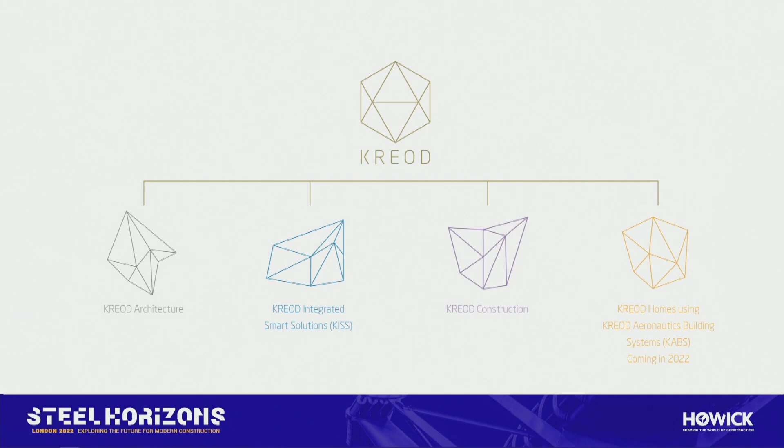It's called KREOD Architecture. And we have a startup company called the KREOD Integrated Smart Solutions, KISS. Under that brand, we have formed the KREOD Integrated DfMA Intelligent Automation Tool software. Following that, because we do the digital assembly simulation, the question is, what can builders do that we can't? So it turns out we're the contractors now. We're also using our own technology. We developed the building systems called the KREOD Aeronautics Building Systems, KABS. So we're launching KREOD Homes, which is going to be fully customized, parametric, and ready for fabrication with a clear costing and deadline, etc.

So firstly, I'd like to share my personal story. It's the KREOD London Olympic Pavilion, which I designed and built for the Olympic Games back in summer 2012. It all started with an idea. My background is computational design and digital fabrication, which is still playing a very important role in the AEC industries.

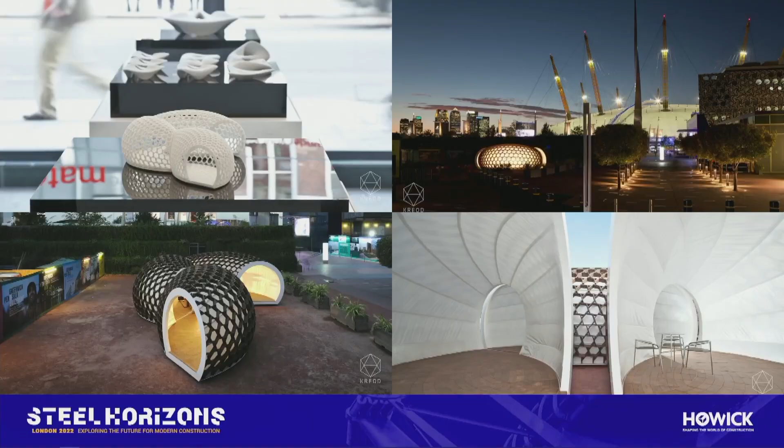Following my studies, I came up with this design. It's a pavilion. And when I asked around, I wanted to build it. When I asked my colleagues and teachers, they said it's impossible. Why? The reason is because I was a young graduate and I simply didn't have the recipe of success because so much I didn't know. And there's a real world out there.

There's so many challenges. So the question arises, who is the client? Who's going to pay for this? Where do you build this? How to do this? Who's going to solve all the design problems? I couldn't answer all these questions, but I firmly believe I can do something.

So I transformed from a student into an entrepreneur, started pitching a range of companies. I sent thousands of letters, spent £2,000 on stamps and envelopes, pitching this idea. After thousands of attempts and failures, I've managed to convince a range of companies who believed in my dream. So they kindly sponsored their products, services, materials, and also the land outside the O2 arena.

So this is the pavilion I designed. It's a movable kind of structure. It consists of 3 identical elements on clusters, so you can push them around, creating different types of exhibition spaces during the day. At night, you can push them together. It glows in the dark like a Chinese lantern. It also secures itself.

So each pavilion is a very small job, but it's super complex because it's double curvature. Each pavilion consists of 997 unique pieces. Imagine if each member is 1 millimeter bigger, 997 pieces later, it's 1 meter off.

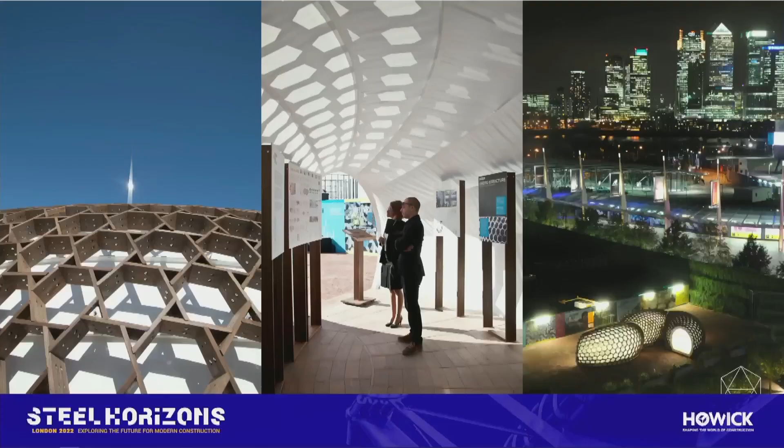That was the comments I had from my colleagues. And so this is the very complex project. It was our first attempt. It was a fully paperless design, engineering, manufacturing, and construction.

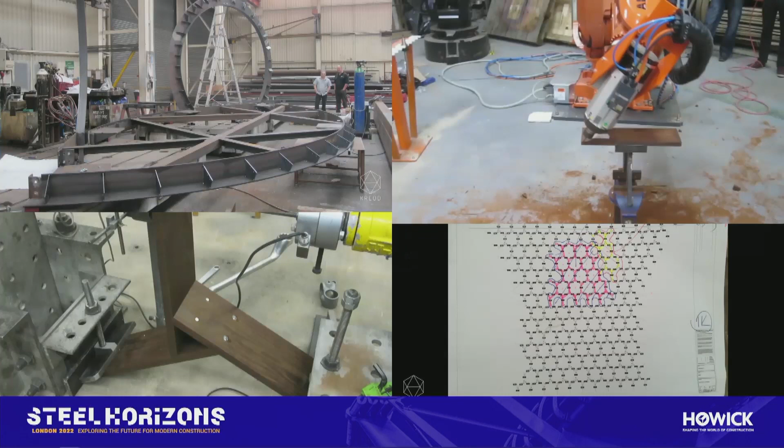And it gives an idea - the steel plant. I closely worked with the steel fabricator, and even understood the chamfer for welding, giving the 100% detailed model. I didn't know the term DfMA, Design for Manufacturing Assembly, but I called it Design Information Manufacturing Modeling.

So this is what it was played at. That's how it was made, because each member is cut in a 3-dimensional angle. It couldn't be made by hand. And the accuracy needs to be aerospace accuracy, plus minus 0.02 millimeter. And the only paper we had was this A3 assembly diagram.

I didn't want to bring my shiny MacBook Pro to the building site, so now we can use these iPads. And we successfully delivered this project. And actually behind the scene, I created a new workflow.

But the workflow is very, very complicated because it requires a very specialist skill - the programming, scripting - and then from the knowledge sharing and product life cycle management point of view, this is not transferable, because each designer, or with computational design, they always come up with a different solution, the same outcome but a different journey in terms of programming. So I found this very difficult to manage.

And also from the business point of view, you can see this kind of job requires a special skill, and that's the risk. So I realized that I must come up with a system so that you can automate the process, so we can focus on business growth rather than dependency on highly skilled people, which is very, very dangerous in the business world.

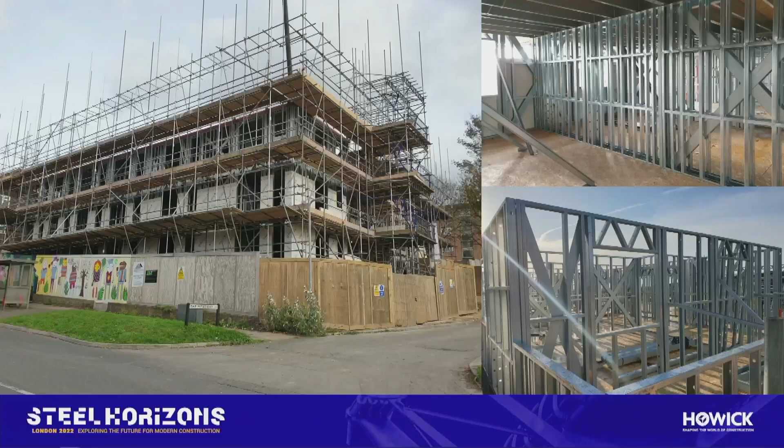So we've been in the background developing an automated light gauge steel frame software on Dassault Systems. This is a job we were involved in, working with Nigel closely, and also Nick. We've been doing this automation. So the principle is, just automate the process, really.

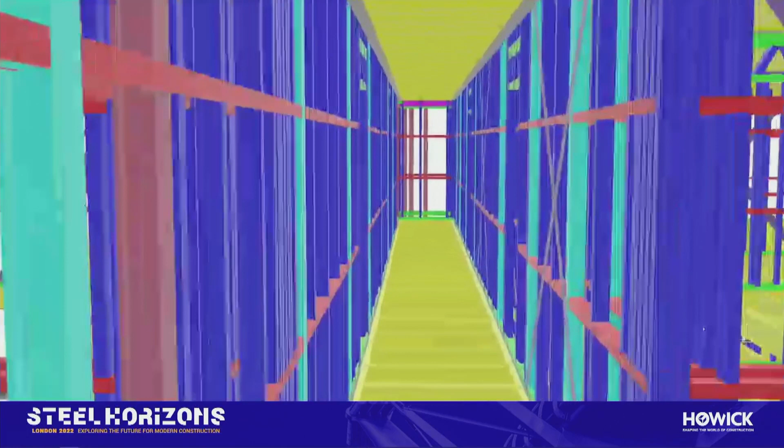I think this job can be easily generated - the computer does the job, which is 3 clicks. And I would say it was 3 hours - yeah, we can change to a better computer. And the principle is very simple: a surface. This example, a surface or a solid, a block. So it generates a wireframe so I can pass it to my engineer Nigel to do the structural analysis.

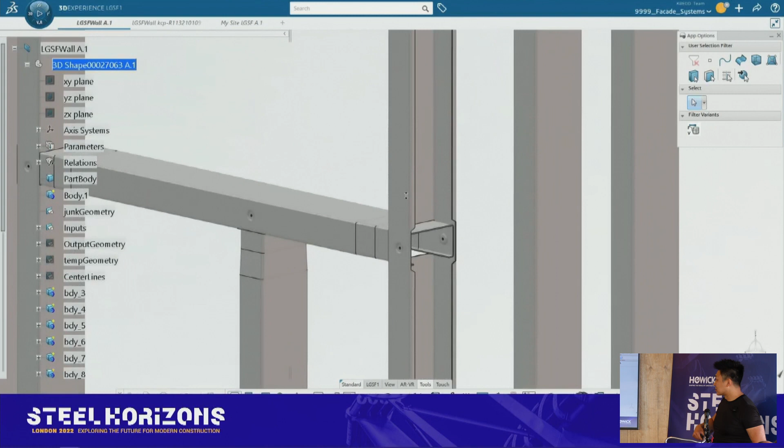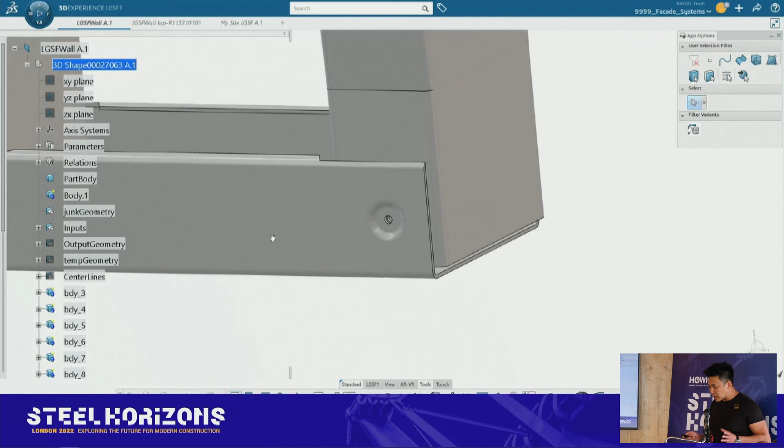Once we can replace the stick models, it generates 100% detailed steel frame. And also in the background, it automates the drawings, which I don't need - it's just for building control, and more importantly, it's the manufacturing code. So I can pass it to Viri, one of our manufacturers based in Lithuania. So in this way, we're in control, because the steel frame itself is just the beginning, actually.

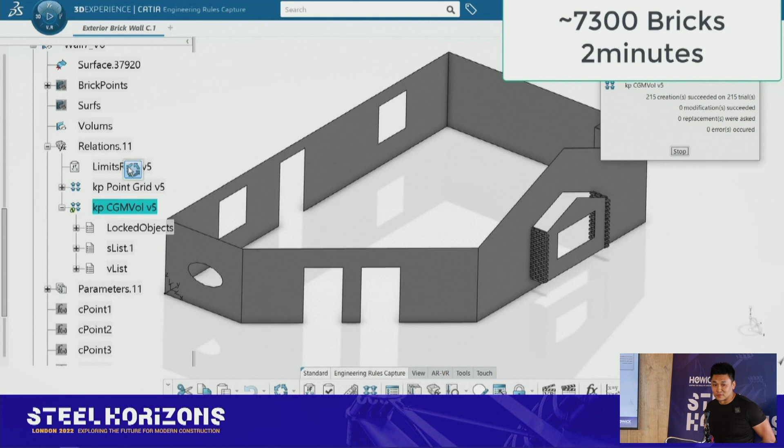We need to consider the facade systems - the brick slips or cladding panels. So I have invested and developed a range of automation tools. For example, this is just a random surface - you just click a button, and it tells you we need 7,300 bricks. So the steel frame for Howick, just with manufacturing code, we can give it to any manufacturer in the world, and the rest of it, bill of materials.

So people always ask me, how much? How much does a building cost? How am I supposed to know?

You know, I can't tell you. But now, actually, it's an informative design approach from concept design, or the RIBA, the beginning of the RIBA stage 2. We can immediately arrive to the end of RIBA stage 4.

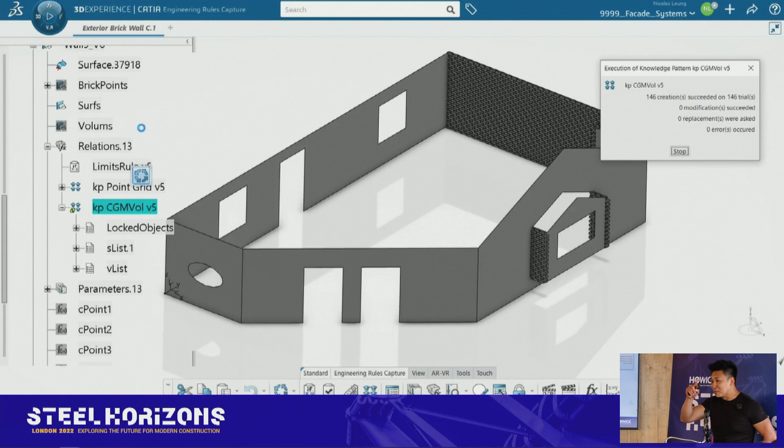So if you're using brick slips at concept, we might consider other cladding panels, say steel panels. But the steel price has doubled since the beginning of the pandemic. So we might consider composite cladding systems.

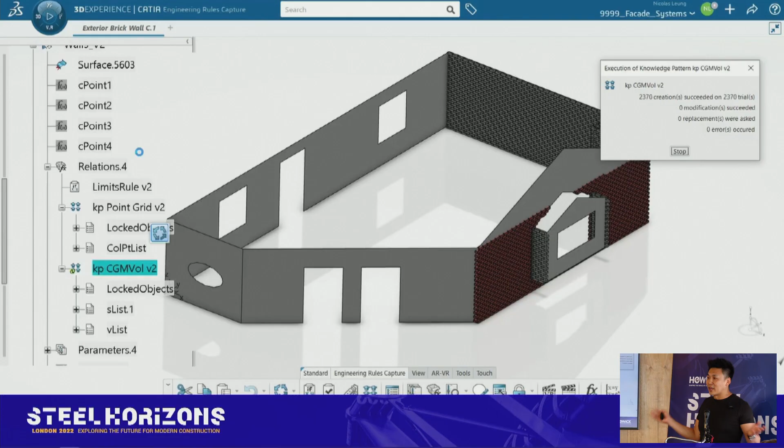This kind of informative design approach gives you certainty when you're running a business as a developer. Because once you decide the material, say Kingspan cladding panel, but now the price has doubled, suddenly your project is no longer viable. But if you knew this, you can make an educated guess what the steel price will be in the next few years.

So we might think, we're going to use composite panels because the pricing isn't jumping too much. Once you've got the planning permission, it's not that easy to change it. So this is the solution.

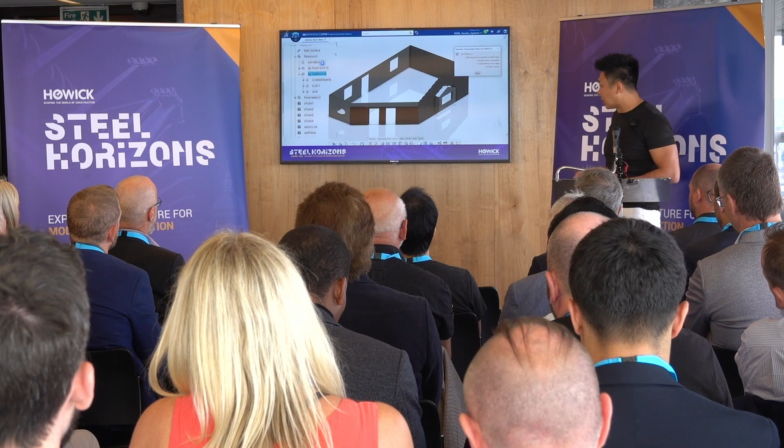We work with developers as well as a principal contractor, building a range of buildings, residential developments in London, and there's potentially an apartment block in Birmingham as well.

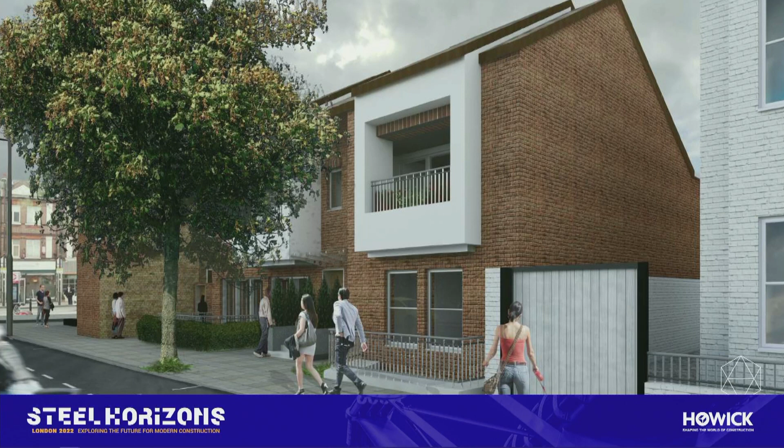So this is the job. We are the principal contractor, so we provide turnkey solutions. This is one of the projects - my investor bought it as land with planning permission, and our job covers so many roles: turnkey contractor, lead architect, project manager, principal contractor, and also the MEP contractor.

That's another challenge, it's a very steep learning curve. I never understood why this industry worked in the way it did. But anyway, we're solving problems step by step.

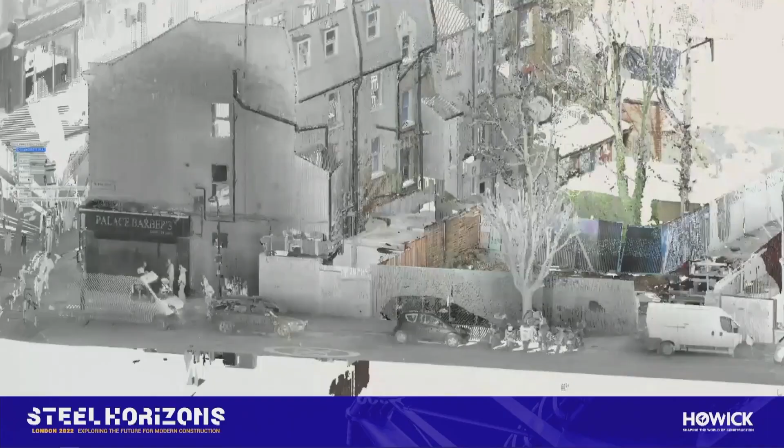So this is the risk assessment. Really, we don't use any drawings - we had to produce a drawing for my subcontractor, the basement contractor, for setting out drawings. But as you can see, the site is very, very tight. You've got illegal basement developments next door. We just don't know where they are, how deep they are. We didn't know the condition.

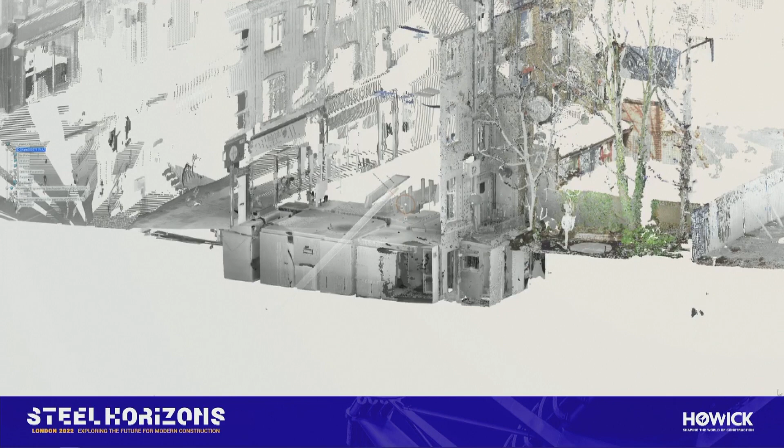We did a point cloud scan, which is 12 gigabytes. Initially we had a ground beam planned on the site, and I realized that's just very risky. Even though we did 12 pits and dug down...

Actually, the internal wall is 107 millimeters away from the boundary line. So if we build a trench, it will crash into their building and there will be some claims in the future. So before construction started, we saw the problems. We changed the design - it just keeps us out of trouble, keeps everyone out of trouble.

And also the construction simulation is very important, because my background is not an architect really. We design buildings, and we're now building contractors.

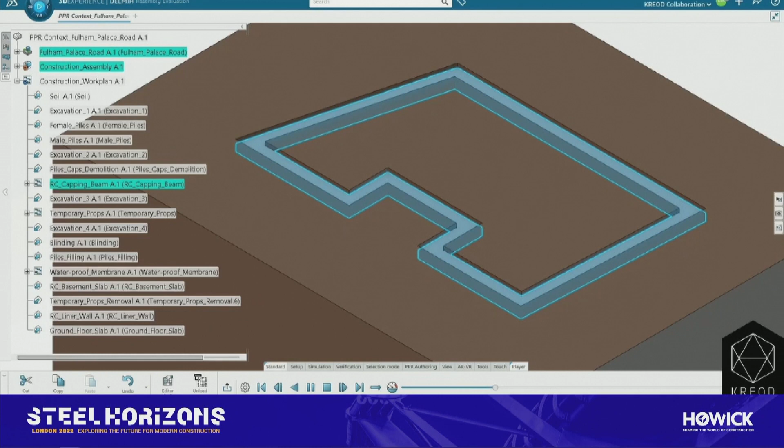So we do using simulation, assembly sequencing. We understand from the detail of the 3D, it drives the Gantt chart program. So we understand any changes, any impact - you consider dependencies a month ahead.

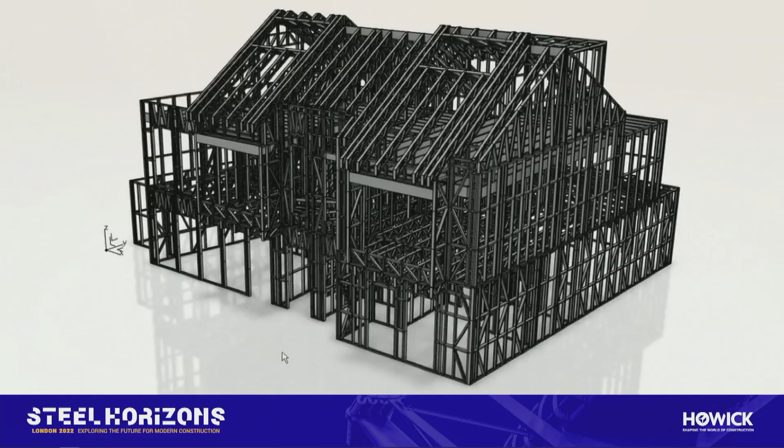So it puts them in a really, really strong position. Understand, it's all about risk management at the end of the day, finance as well. So we program everything in terms of logistics, how things go, how things run, which is going very well. And this one we're finalizing detail with my structural engineer - so we just automate the process.

Another thing is the MEPs as well. The current issue with all this framing software - Techno, anything - the problem with them is they want the final design. But the final design doesn't really exist until we get the MEP designs, because it clashes. So the current software we have in the market is very tricky if you want to make a change. For us, it's just a few button clicks.

I'll show you some more examples. So we can understand, any design changes, we can just change accordingly. This is fully parametric from the steel frame, the building envelope, internal fit out, plasterboard - how many sheets of plasterboard, boarding, everything. So that spits out the cost, a spreadsheet, a shopping list.

So what I'm introducing here is open book contract. Costs, this is my labor, and this is our profit, which is 28% profit on the construction, really, really high because of the efficiency. And we don't need people. That's the beauty of it.

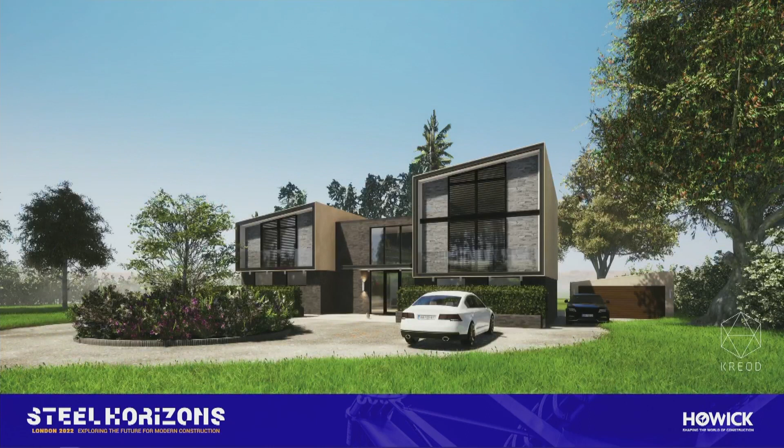This is another case study we did. This is the primary house we designed. We had two architects before us, both from Grand Designs. It's a greenbelt development, and they didn't get planning permission. So we came along, we're very good at plannings as well. We got the planning, and it's a private house, really nice actually. The cost for this, we actually changed the design, even double high sliding doors. So the price of this job is £180 per square foot.

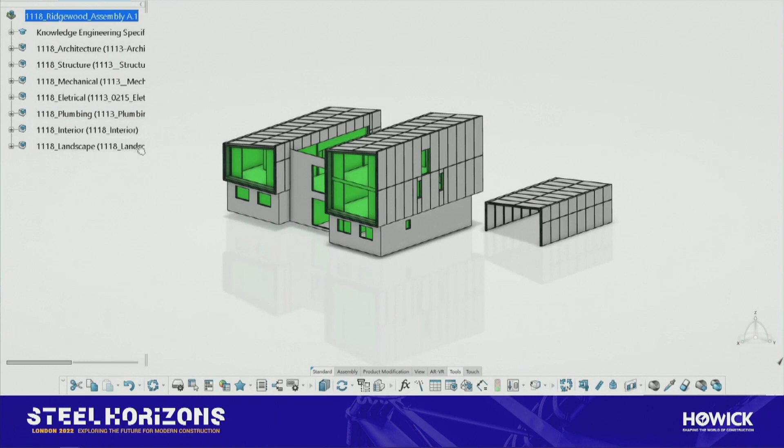It's pretty high end. And there's an entire automation simulation that gives an idea, from the concept design, our KREOD tool, automation tool, and it clicks to the garage. Very conceptual design, reference surfaces. You click on the panel, in seconds it generates 100% detailed cladding panels. And you click again, it will generate all the cladding rails.

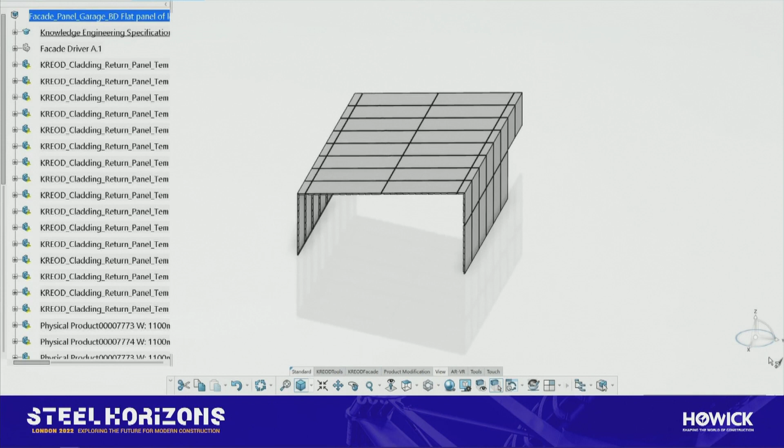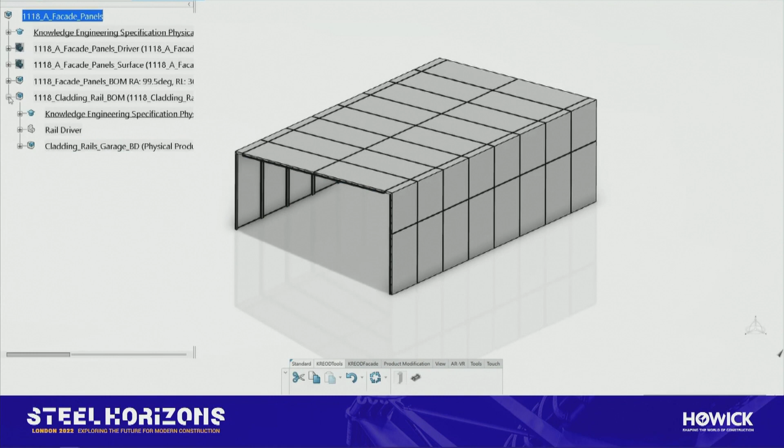So the way we program it, it's definitely going to work. If it doesn't, it won't generate it anyway. So there's an engineering template we created. And behind the scenes, it generates manufacturing shop drawings, manufacturing code if you require, anything quantifiable. It just gives a spreadsheet - people are interested in how much.

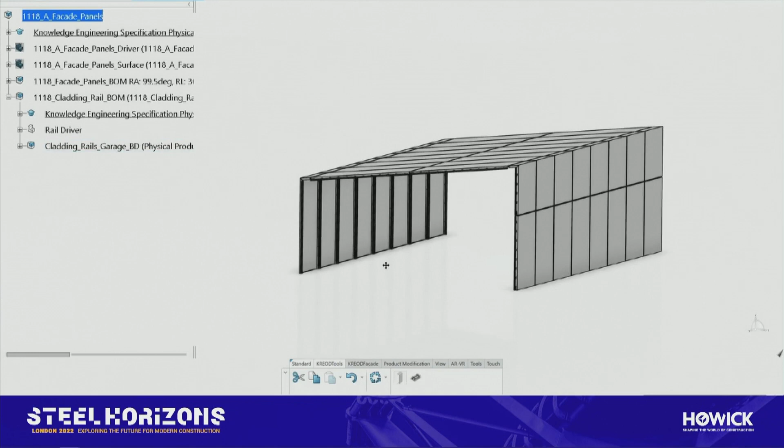So this is a level of detail, fully automated. Maybe some manual tweaks, but pretty much it's just a click. So the idea is my receptionist can click and do the job without realizing what's been done, but the job is done. All we need to do is due diligence - check, is that okay? It should be, yeah. Just double check.

And this is the envelope, just the envelope itself. The building we changed 12 times. In the beginning we didn't have the budget for the underfloor heating, and the client wanted - because they're private clients - they wanted the roof pitch to be steeper. They wanted to see different options.

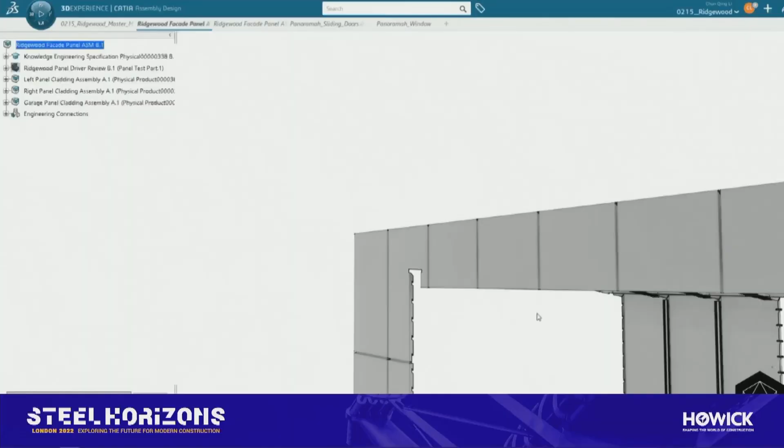And if you work in the traditional way, you're the architect, you produce design intent, you give it to the appointed principal contractor. The principal contractor needs to hire a facade engineer. The facade engineer needs to work with a manufacturer. So if you make any changes, the chain of effects - people want more money, need more time as well. That's how the relationship goes pear-shaped. So now we have this solution.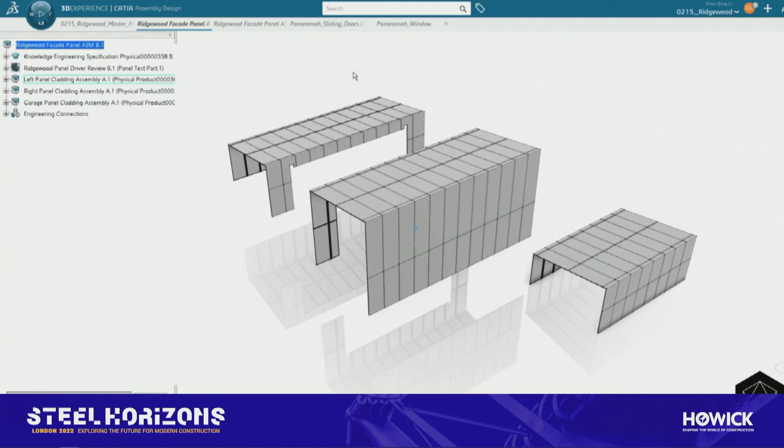We made the changes in front of them. You click, 7 minutes, no hard feelings. What else? So 12 changes - it automates everything. And last minute, we have the budget for underfloor heating. Good news - not good news for us, but yeah, it's okay, we have the software solution.

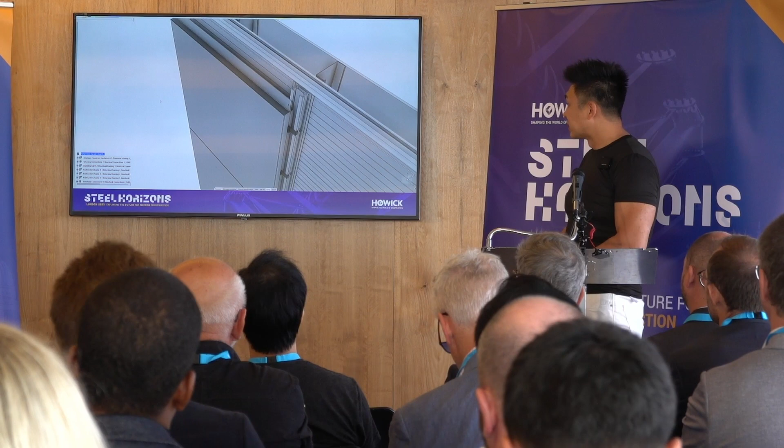And there's a digital mock-up, so we need to understand how to assemble them. Every single part is a digital twin to the real world. And this is our engineering template - when we created this, ready for manufacturing, we created unfolded drawings and everything, DXF if you need it, or just CNC, spreadsheets, manufacturing codes. In terms of bending parts, it's a K factor.

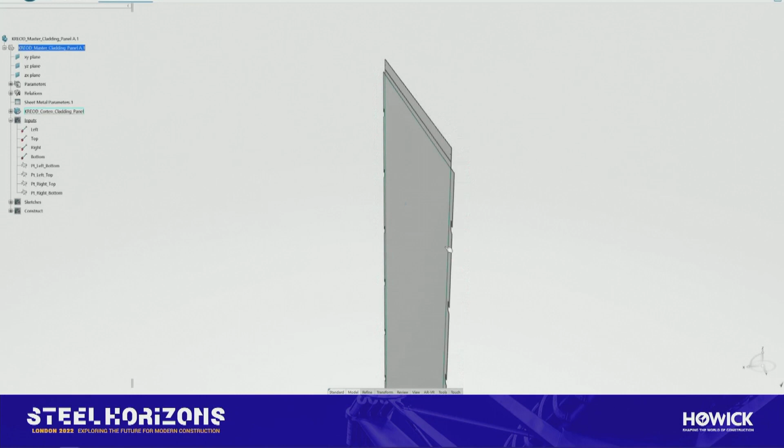Obviously, different manufacturers have different bending, different machines. We just need to double check - what's your bending K factor? 3.728, yeah, we just change that. Automated, job done. And steel frame, light gauge steel frame.

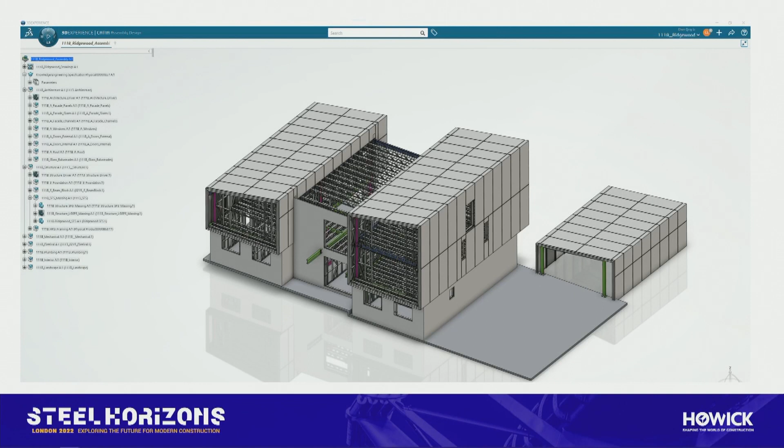And yes, this is the final, the entire building envelope. Assembly drawings - it tells you how many different panels and the quantity. Shop drawings, all done, automated, by the way. We didn't touch anything, it's done by itself. So that's the beauty of it, efficiency.

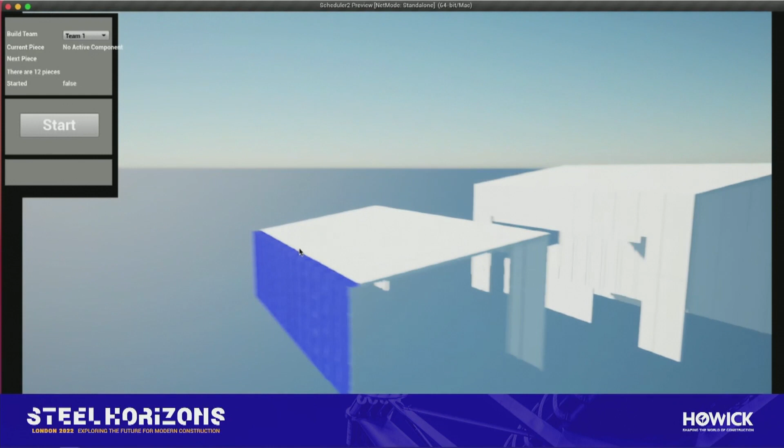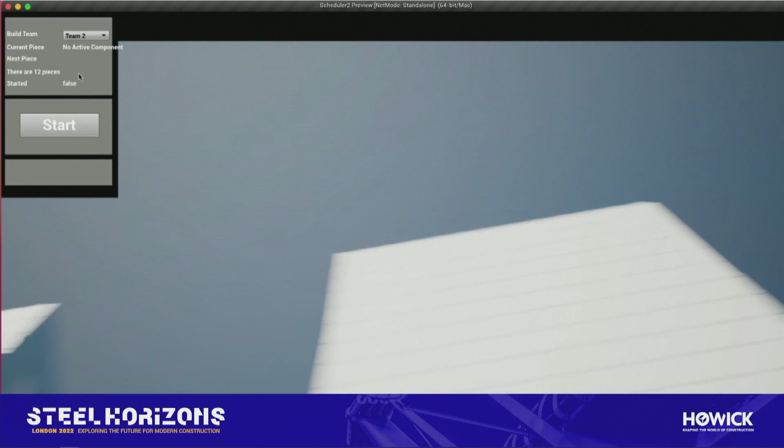And also, how do we build this? People don't understand, they don't have the real skills for unconventional construction methods. So we developed very, very simple tools. It guides people on what needs to be assembled. So it could also simulate the construction process - we know how many people and how long it's going to take.

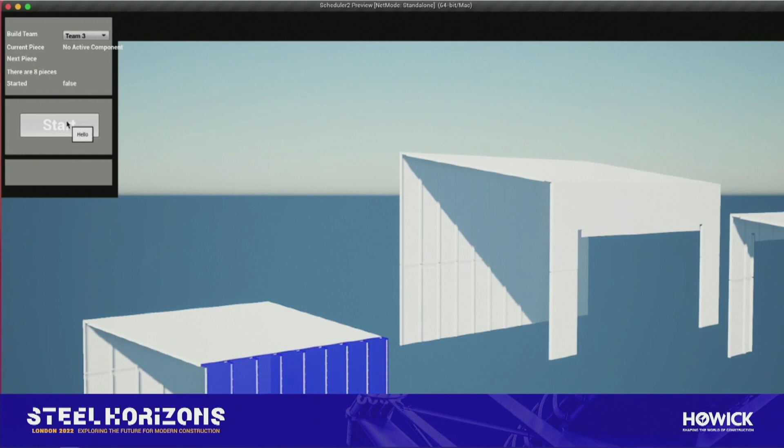So what we're promoting is a very liberal approach. If your job during the next day is like this, in theory Lee and Nick can assemble 5 panels. If we did 10, we'll be double paid because we encourage you to work faster, or pay more. But ultimately, as a building contractor, it doesn't affect my budget. The job is done much quicker, people are more encouraged. So it's a win-win scenario in this case.